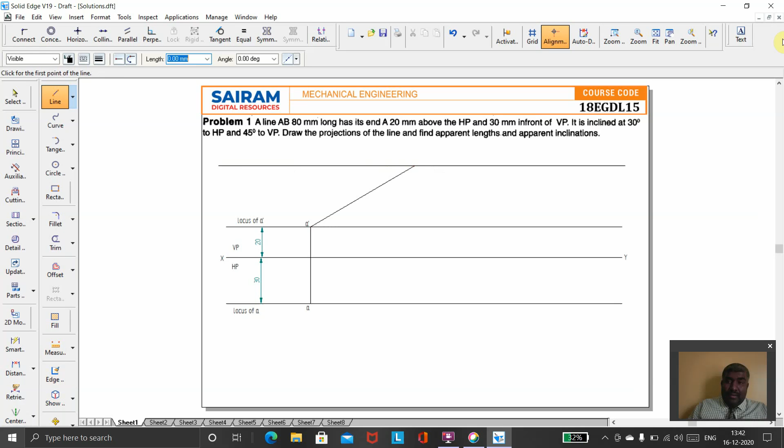At the same end point, you draw the line. So that particular point I want to define as B1 dash, because that is the true length in its front view. So I want to specify that as B1 dash.

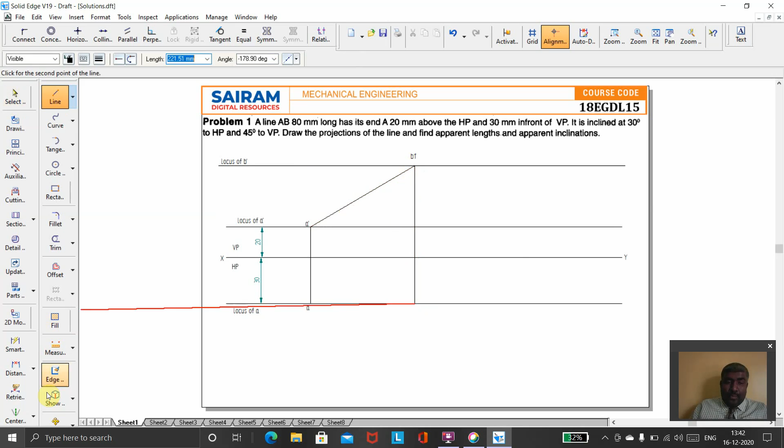Then that line I want to specify as locus of B. I want to specify that one as locus of B dash. Then I want to project that B1 dash point downwards to the locus A to get the top view of that point, and I want to specify that one as B1.

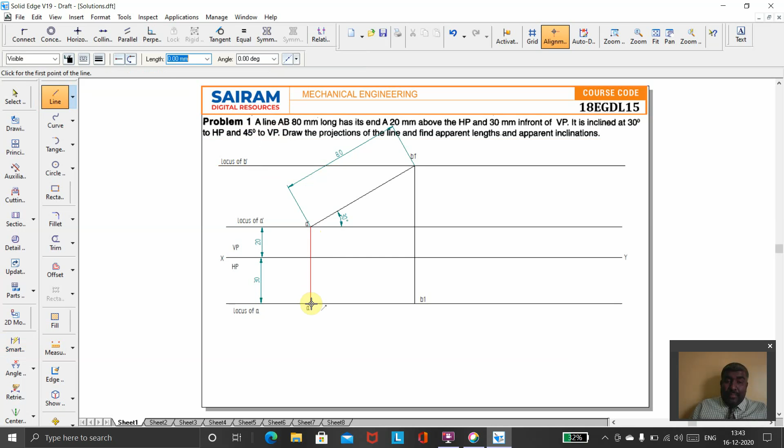So this is when I want to assume the line is inclined to HP. So the inclination they specified is 30 degrees. So I want to take angle as 30 and the given true length as 80 mm. So both the things I specified over there. Now I want to assume it is inclined to VP and parallel to HP. So I go for A point and the length is 80. The angle I have to go for 45. Since I am going downwards, I want to take it as minus 45 degrees. So I will get the point.

So I am going to draw again the locus at the end of the point, and I am going to define that point as B2, that is nothing but the true length in its top view, and that line I am going to define as locus of B. So once you got locus of B, from B2 point I have to get the front view of B2. So I want to project that it has to come to the locus A dash, and I want to define that point as B2 dash. So once you got B2 dash, I will go for arc by center point to get the merging of both the conditions.

So what I did is, first I assumed that it is inclined to HP, then parallel to VP. Then I assumed that it is inclined to VP, parallel to HP. Sorry, this angle I have not specified. I want to specify the angle. So this line and this line I want to specify it is 45 degrees and true length it is 80. So no need to show on both the sides.

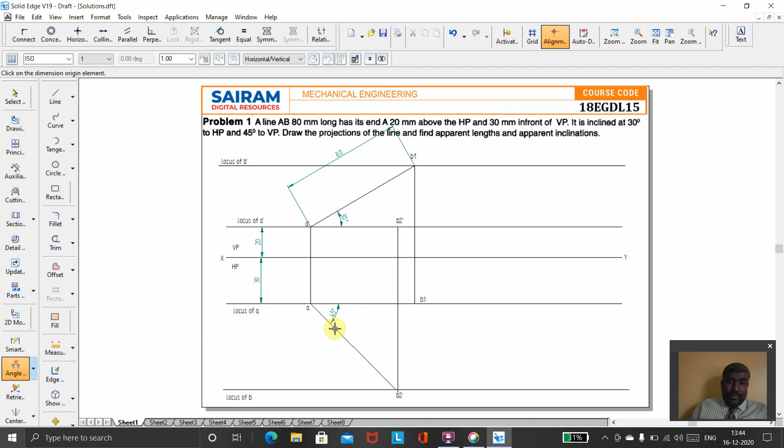So once you got B2 dash and B1, I will go for arc by center point. Select A dash as the center, B2 dash as the radius. I am going to draw the arc. I want to project the arc. Similarly, A as the center, B1 as the radius. I want to draw the arc. Now go for trim option and trim off the extra arc after the locus. So where exactly it is cutting the locus, that point I want to define as B dash in the VP plane. HP plane I am going to define that one as B.

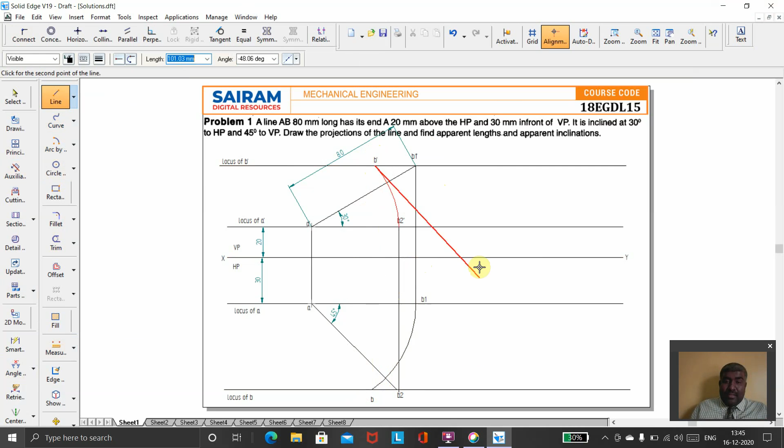So now how are you going to check that it is exactly correct? So if I join B dash to B, if the line comes in an exact manner, then the problem will be correct. If you are getting any disturbance over there, that means somewhere it has gone wrong. In this problem, just for your explanation I have shown it. So the mistake the students make is like this. They won't make the proper connection over there. So that thing should be avoided.

So now I want to correct that. So I want to select B2, exact endpoint you have to select. So you can see the endpoint. I'm going to select that and draw a vertical line. So now from there I want to draw the arc. Now you can see that you can get the exact point where the line will be joined in a vertical manner. So you can see I'm going to get the exact dimension over there. So now the problem will be correct.

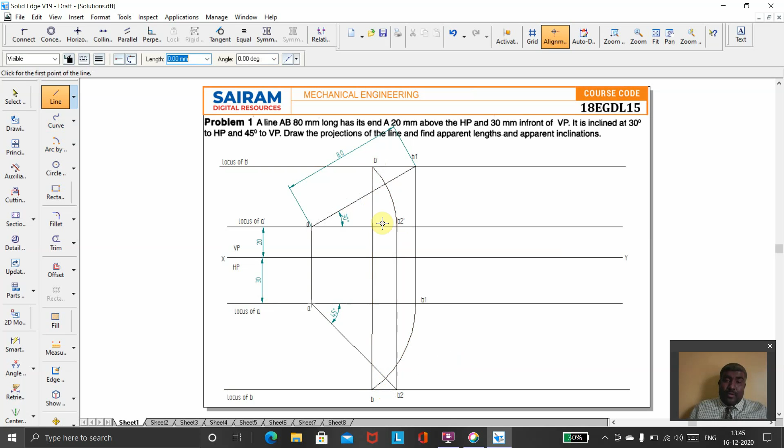So what I can do is take the line option, A dash as the center, B dash as the radius. I want to join the line. So this thickness I want to give as 0.5 mm, and I want to draw another line from A to B. That I want to give the thickness as again 0.5 mm. So I go for dimension, take the small dimension. So I get 56.57 and 69.28. That is the apparent length in front view and the top view.

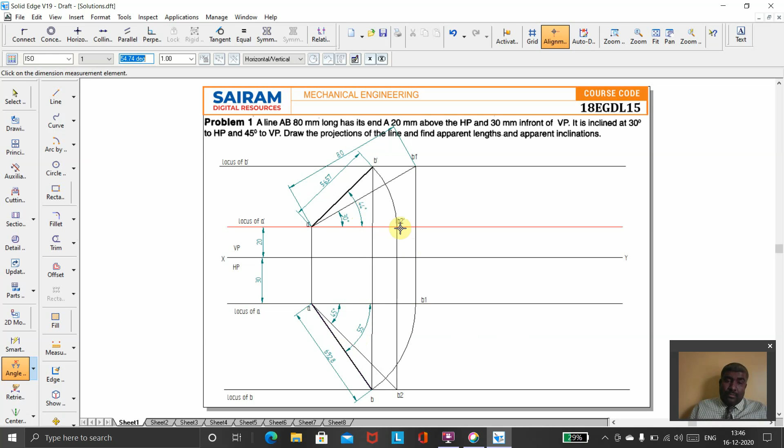And I go for angle between. So this angle is 45 and this angle is 55 degrees. So this is how you can give the solution for the projection of the given problem. One thing you have to remember is the thickness of the lines. All the projection lines should be 0.13, this XY line should be 0.35, and the views, that is front view and top view, should be given a thickness of 0.5 mm. And you can write the values at the last also, or you can specify directly in the projection.

So in the next class, we'll see the other problems on the line.